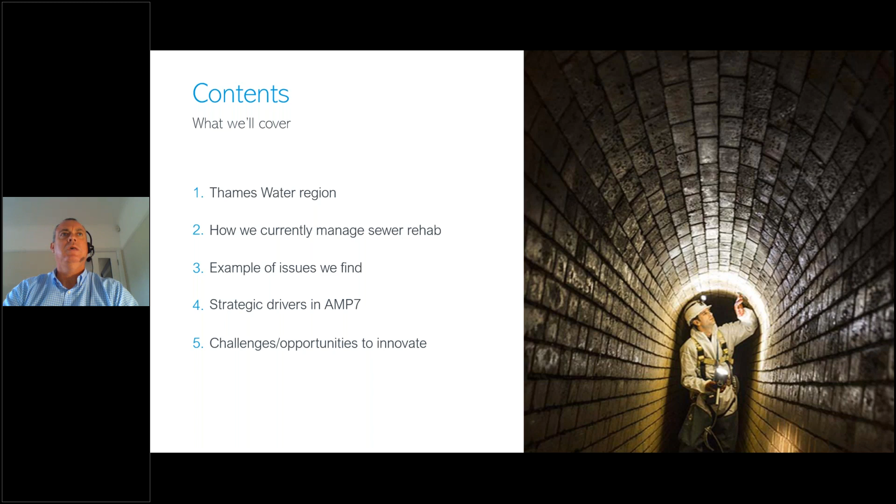Thames Water. Obviously, a very large water company. We have somewhere in the region of 109,000 kilometres of sewers, and a big area covering a lot of London, but also the Thames Valley, all the way down to Cirencester, up to Banbury and places like that. It's interesting, 4.6 billion litres of wastewater per day.

To put that into some sort of perspective, 53 cubic metres per second is the average, or an Olympic swimming pool in 47 seconds. That's the way we tend to look at it. But when it rains, wow, you do realise how much hard surfacing there is in London. So it's a very, very interesting place to work.

With those sewers, the great part of working within Thames is that we have a lot of the original Bazalgette sewers, and the quality of those sewers built is phenomenal. They still look the same as they did the day they were built, and some of the rehab work we have to do on those is sacrilege in my view. When I have to demolish a Bazalgette structure, it's rare that we do it, but we really hate to have to do it.

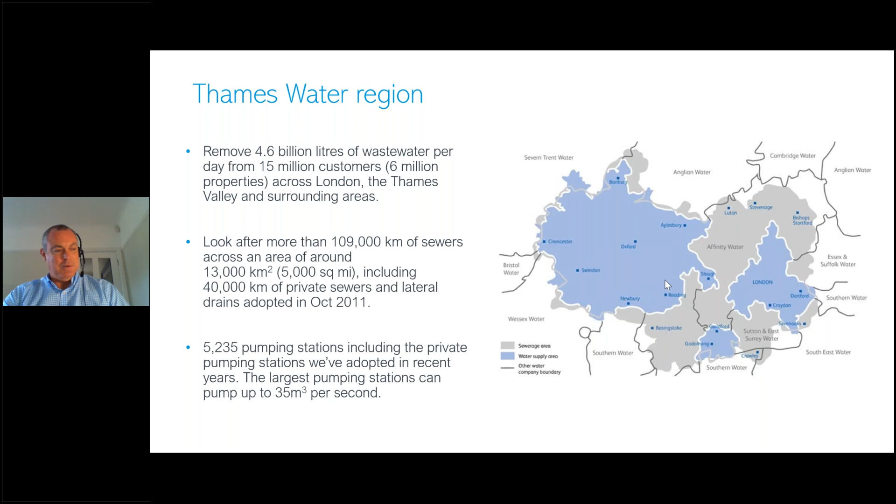A lot of pumping stations, 5,235 pumping stations, and we have some monsters. The biggest one is capable, although we don't use it at that rate, of 35 cubic metres per second if we came down to using that, and that would be absolutely going for it, to be honest. But that's some of the terminal pumping stations that we have.

How do we currently do things? This is where a lot of change is coming into the equation at the moment. Too much reactive work still going on. With this sort of reactive work, there really is a trick about these things these days, which is to actually deal with things earlier. Don't have to react.

If you react at the right time, you're going to actually deal with things a lot cheaper, and I'll talk more about that in a sec. So we're trying to get away from reactive and get more into risk modelling, and actually coming up with proactive solutions to the work.

To do that, though, we need to inspect. I've worked in the industry for nearly 40 years now, with CCTV and that, there isn't enough of it. We need a lot more CCTV surveying. So we do a lot of CCTV now. There's a lot more happening than probably was in AMP6, and certainly more than AMP5 going on.

Really using that information from that data coming back in, we are now certainly doing sensible programming, and dealing with the issues at an early stage as far as possible, using the most appropriate techniques.

Prioritization is a big thing. We don't have never-ending budgets, obviously, and if we can actually get in there at the right time and prioritize, deal with those assets, we're going to find the problem will be dealt with much more efficiently, with less disruption to the public, to customers, and at a far cheaper rate.

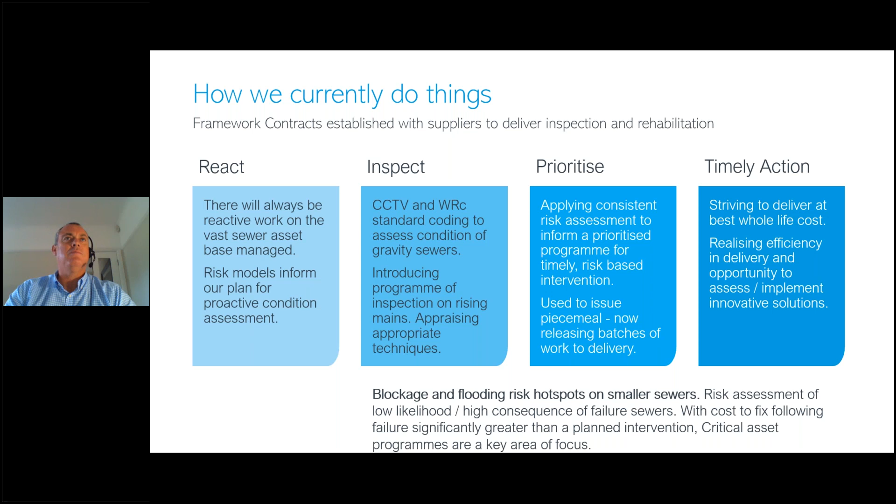Let's go through some of our current interesting projects and some of the problems we are dealing with now. Hydrogen sulfide attack is a major one that we're having a lot of trouble with presently. You can go in there and dose the pumping stations, etc. But what we are finding is that a lot of these places, unfortunately, from previous decisions, it's actually too late.

The sinkhole was around 8.5 meters deep. The top of it was 8 meters in diameter, and it developed within the building. When the actual collapse occurred, we had to find a very quick method of repair, and that repair was to dump hundreds and hundreds of tons of shingle in there. We had to keep the railway stable, so a very, very interesting project to work.

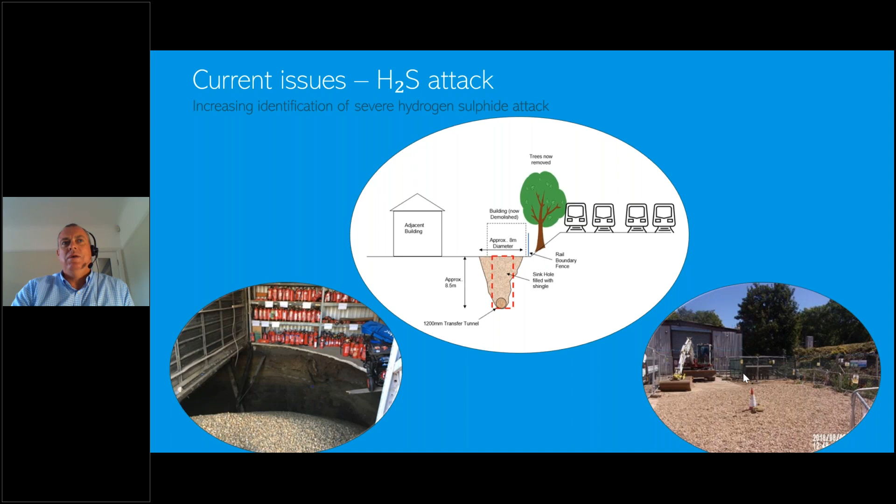What did we find? Big deep excavation next to a railway, not the best of things to do in anybody's book. We had to dig out a very large shaft. We took a decision early on that we didn't know what we were going to find, so we actually structured that shaft big enough to do some serious work from, to allow us to do some pipe jacking if it came down to it.

I talked earlier about interventions. If this had been picked up a lot earlier, this would have been a fairly straightforward lining job. In reality it was difficult - there's 700 litres a second of flow coming into this system from 2 pump stations, but it's one of those jobs where it would have been far, far easier to deal with if we'd intervened at the right time.

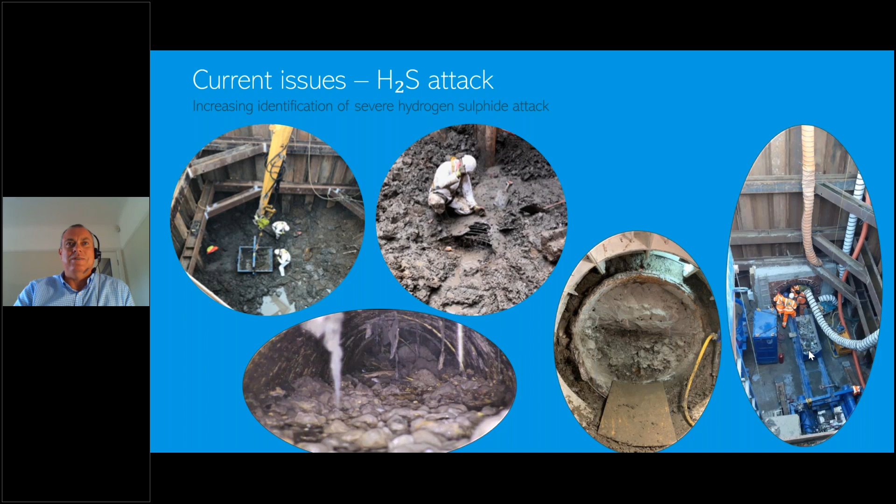A lot of you know me from the railway work, so a lot of my career has been 20 years in the railways. Now this is another interesting one - an asset we considered was owned by Network Rail. Told them about this many years ago, and when it came down to it, they decided actually it's yours, and managed to eventually produce the documentation that proved it was owned by us. They did that 4 weeks before they were due to relay the railway tracks above it, mysteriously.

We had to react to that incredibly quickly, and when I say incredibly quickly, that was literally 4 weeks. We had that stabilized and in a situation where Network Rail could come in and undertake their heavy works to get the railway track up to a decent standard again.

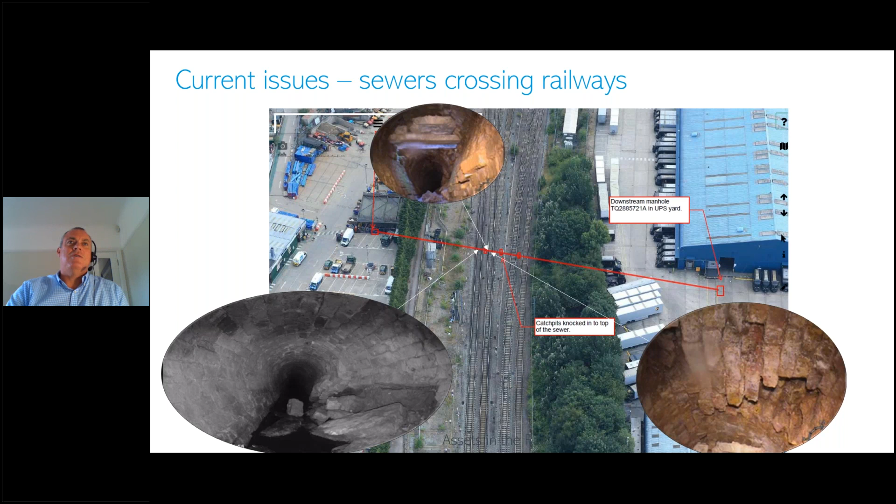One of the other things we get is a lot of third-party issues. Very, very dense urban areas, obviously, we've got, and there is a lot of very expensive construction works going on. When I say interesting, there's a very common theme to this, and it's certainly piling - piling near some of the larger sewers, but also some of the more minor ones.

We're forever spending time cutting concrete out. We're using a lot of robotic techniques now, high pressure water and ultra high pressure water cutters and all those sort of bits and pieces to get this out. But it is a massive problem, and solutions to that are going to be something that we really, really are keen on.

The one on the left there is interesting - this was an exceptional one to see. Dead center hit with a 600 diameter pile on a 1.8 diameter sewer. If I was to tell you that's actually 8 meters deep and within about 2 meters of a railway track, it's pretty frightening that they're there. Luckily, it was a dead center hit, and the thing was judged to be fairly stable.

We're trying to find a way of repairing this at the moment. That pile is actually taking load, so we're having to find a method of getting that pile out with the structure that's above it. Luckily it's not a building, it's actually a structure that's above it, to sort that one out. Concrete's great.

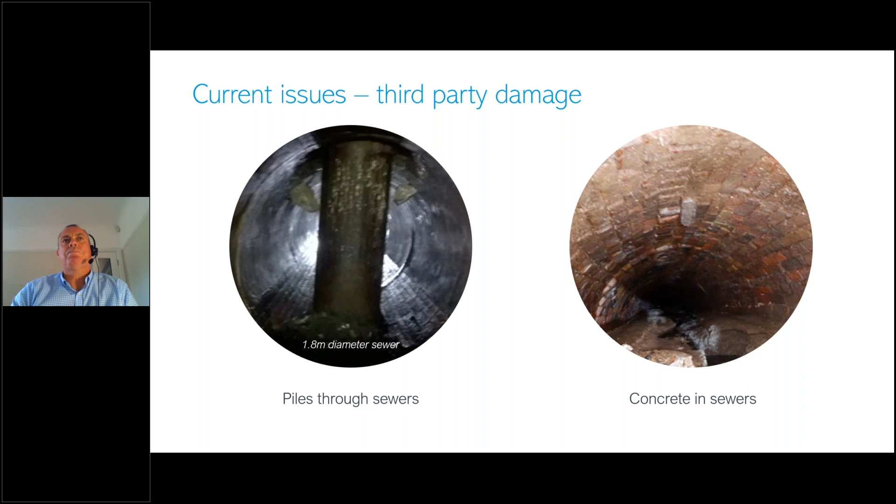A biggie, this is interesting. This is one of the latest things we're suffering more and more from, as I imagine a load of the other water authorities are too. Ductile invert, so invert corrosion in ductile iron pipes. Typically these are pipes from around the 90s, somewhere around that period, and they had a bitumen lining on the inside of the ductile iron. Great product, love ductile iron.

Wrong lining, unfortunately. What's happening is we're getting this invert corrosion occurring on these pipes, where the ductile iron actually wears out slightly in the invert. You're getting some sort of electrochemical corrosion occurring, and we tend to get this lovely little strip developing along the bottom of the sewers, maybe 50 mil, 75 mil wide, pitting at 75 mil intervals. One of the few times we like wet wipes in this industry.

You can see that pipe there, the section of pipe that's been taken out - it's held together with wet wipes. What's happened is they've basically been forced out where the water's actually going through, forced into the gaps, and they actually seal the pipes up very generously for us until you take the pressure off that rising main and let the groundwater pressure in. It's in an area typically with high groundwater levels. The groundwater comes out and pushes the wet wipes back in, and next time you switch that main on, you've got a problem somewhere else. It's an ongoing problem.

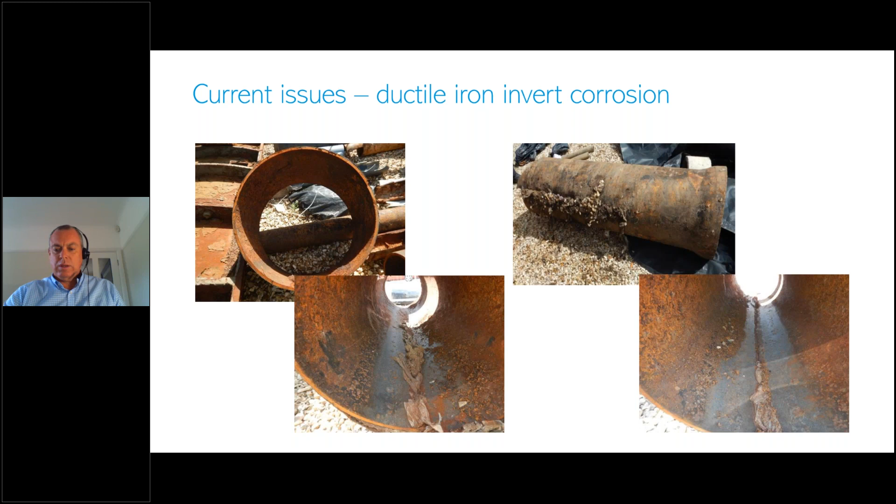Okay, what are we up to? So what are our drivers for AMP7 basically? Certainly the big thing is dealing with critical assets. I come from a world of doing railway sewers, sewers under railways and stuff, but it's much wider than that - we've got numerous critical assets. It could be a pipe just because of where it is, or a pipe that has such a strategic importance you can't divert it or whatever else. There's a lot of work going on around these critical assets at the moment, actually understanding them and producing data, schedules and mapping, so that we understand these assets in a lot more detail.

Ultimately, we've got a lot of work going on with the reduction in uncontrolled escape. A lot of the smaller sewers, we've got numerous sites going on. It's not my side of the business, I must admit, but there is a lot of work to try and stop this going on. We have a lot of problems in central London, obviously, as well, with flooding from sewers. We've got some pretty spectacular stuff.

And we have this lovely luxury before long of the super sewer, the Tideway sewer, coming online, which is going to change things a little bit. It's going to be very interesting, certainly for us, with a lot of the Bazalgette sewers - they're incredibly effective things, and when the flows start getting diverted into the Tideway sewer, it's going to be a big change for Thames. Very, very interesting to see some of that going on at the moment.

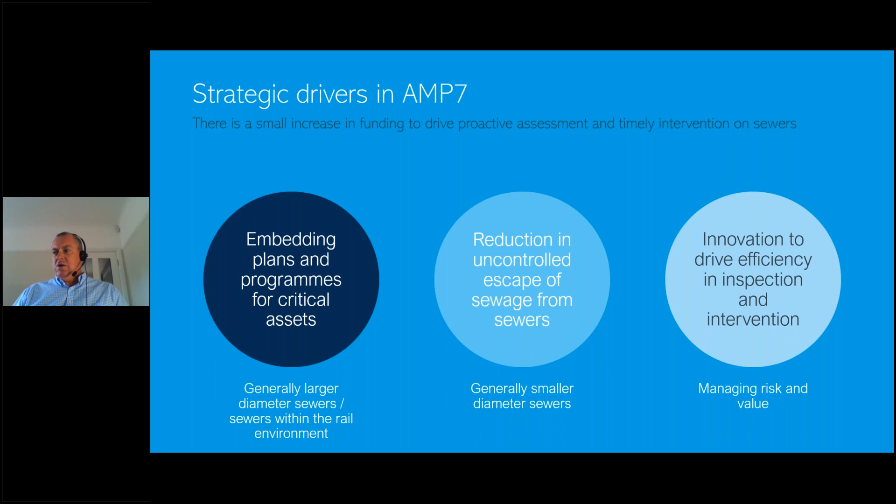That kind of brings me on to the opportunities, and those opportunities are quite key. I've touched on some of the issues that we are planning and struggling with. Well, not struggling so much, we know what we need to do, and we've just got to get those plans into place to deal with them.

And the key opportunities that we're putting out at the moment are associated with rising main inspections. So a lot of work to be done to actually determine the condition of rising mains. It's not easy. We have to generally dig down, do some sort of testing or whatever else, or in the worst cases, actually taking samples out, taking sections out of these rising mains. That has an associated cost with it.

We've got to find better ways of doing this. It's not easy to do, and particularly in some of the assets that we've got, in my world, with the ones that run under railways, actually to get to the rising mains and actually even to take a look at them can be incredibly difficult.

Rising main remediation, the ductile iron, I've talked around that already. A lot of work to be done around that, and new techniques being brought on board. Not afraid to look at anything. It's got to be right though, and if we do find ways and means of doing to that, then that can be a game changer, to be honest.

And one of the particular issues is dealing with bends that we are struggling with at the moment. A lot of rising mains with a lot of 90-degree bends on them for some reason, which are very, very difficult to deal with, and actually do make it difficult with the lining type of stuff.

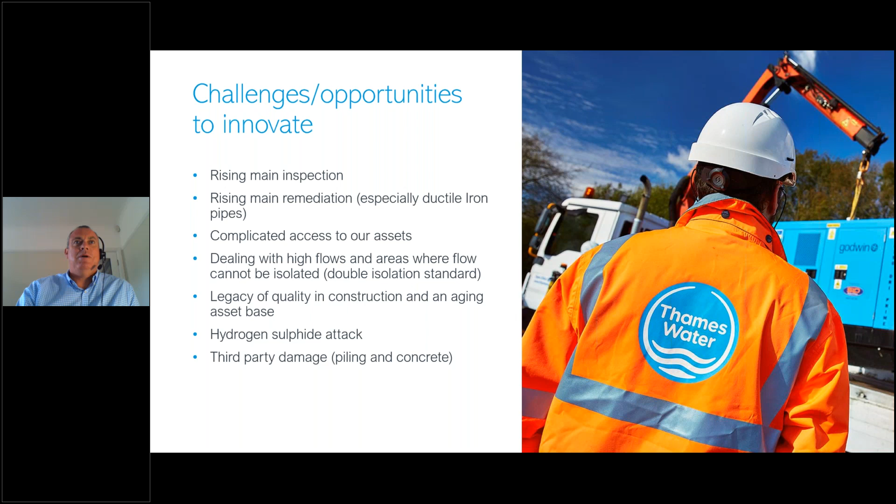So that's pretty much me for the moment. Hand back to you for a second, Ian, if there's any questions.

Hello there, Mark, that was very interesting. The first question I've got here is from Mike Barber, and you've partly answered it, which is because during the past two days we've heard about the effect of H2S attack on concrete pipes downstream of rising mains. It's a bit of a recurring theme, so any thoughts, is this becoming an increasing problem at the moment? I don't know if it's becoming an increasing problem. I think it's the timescale it's been going on for now, and certainly with certain types of pipe, we're noticing it more and more, and it's certainly becoming more of a focus for us as we go through.

It's going to be about intervention. If we can actually get in there earlier and deal with these things, it's not all about dosing pumping stations. By the time you need to dose the pumping station, invariably the damage has been done further down the line. But inspect, maintain, and go in with some fairly low levels of remediation - that's going to be the key to it, I think.

So really, you're suggesting that it's the age of the assets now - this is an effect which we're starting to see. I think from a degree, yeah. I mean, we're certainly seeing there's a common age, shall we say, on a lot of the assets that are showing the signs of degradation that we're getting from there.

Okay, and unless we do something, it's going to get worse, isn't it? That leads on to a second question here from David Pitt, which is about sewer flushing as an alternative to dosing, to change flows and velocities and remove sedimentation and alleviate H2S. Is this something that could be utilized in more situations?

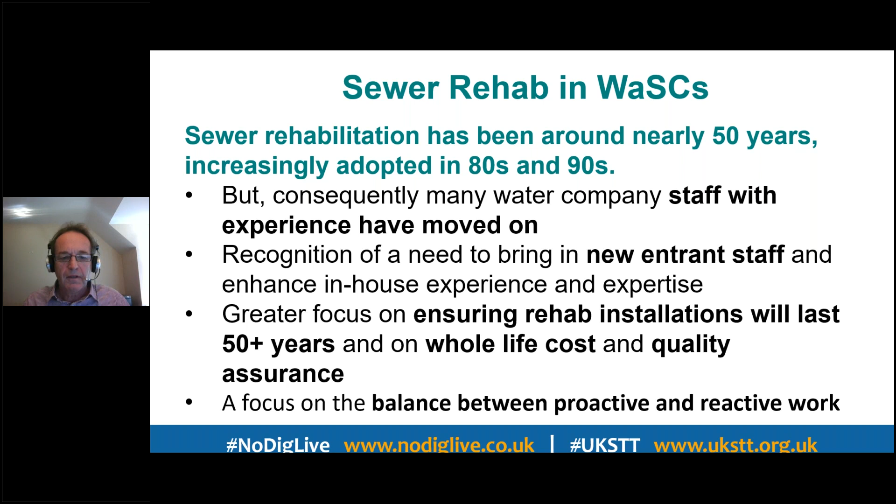One of the things coming out of that, we're sensing at the moment, is a renaissance in interest in developing guidance to ensure this stuff will last for 50 years plus. We're starting to see an updating of key documents. Water UK itself publishes water industry specifications and information and guidance notes, and they are looking at those at the moment.

Most of us will have received last week a copy of the new Manual of Drain and Sewer Cleaning, produced by WRC, which replaces the Sewer Jetting Code of Practice, published about 17 years ago now. SRM,

Sewer Rehabilitation Manual, or Sewer Risk Manual, or Sewer Risk Management as it's now called, is an online platform. A lot of people have a large red volume on their shelf called the SRM and use it for design guidance, but there's a realization the design guidance was getting out of date. So at the moment, there's a process going on to create a new SRM, which will also be a physical manual that can be used.

I want to finally mention British standards, European standards, and ISO standards on this page. We've got Brexit coming along. This may mean a bit more focus on British standards, but the UK is still part of CEN, which writes European standards. The other thing to remember is that increasingly, the standards used for sewer rehab, particularly for CIPP, are now ISOs, international standards, which sit above Europe. So the expectation is that we will be continuing with those as the standards for the UK.

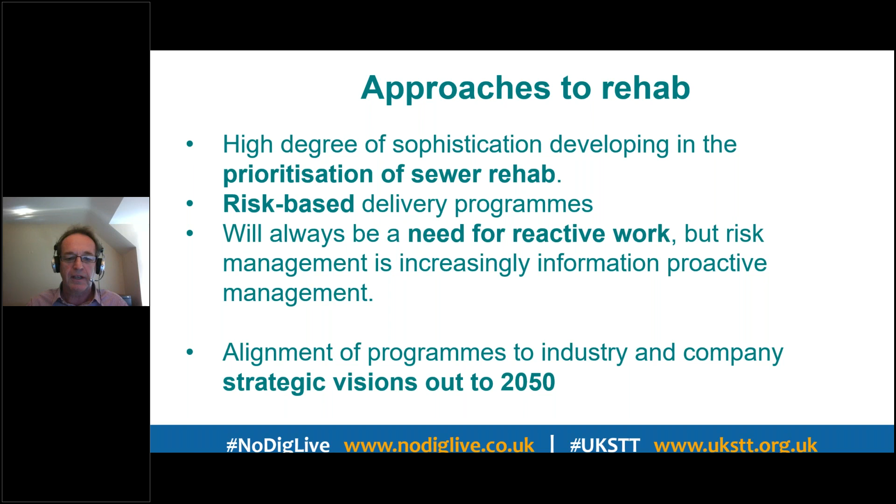Part of this is efficient delivery - tackling known problem areas, and looking at repeat incidents is one element. Yesterday from Severn Trent, we were hearing about root cause analysis in order to really understand the problems and more efficiently deal with them, including rising main bursts.

Rising mains have been, if you like, the poor relation of gravity sewers in terms of rehab. Gravity sewers have been much easier to rehab, so solutions for rising mains have tended to be more dig-down. But increasingly it's realized you can be more efficient if you rehab before the bursts appear.

We're hearing about dealing with the worst hit customers. Sewer flooding incidents within buildings are a complete no-no as far as both CC Water and Ofwat are concerned.

Yesterday as well, we were hearing that there's a focus on efficiency through doing a number of small value schemes which have high value output, as part of the selection. There's also a move from piecemeal to more batch delivery of work. The mantra - risk assessment, prioritization, intervention - underlines what we're hearing about. And let's not forget the innovations which we come on to.

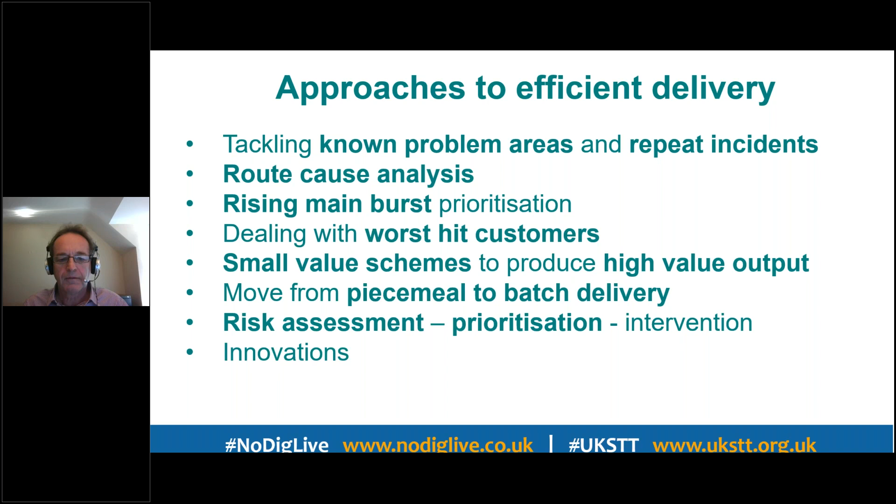Now, I've picked out a couple of other areas of particular interest: artificial intelligence for coding of CCTV.

It's been touched upon - there's general frustration that with sewer rehab, an awful lot of time has to be spent in manual coding, and there could be a better approach if it was possible to use artificial intelligence, so crews can spend their time cameraing and not coding. In theory, this would help achieve the goal of surveying more sewers and getting a much better handle on current condition and changes in condition over time, which CCTV can help with.

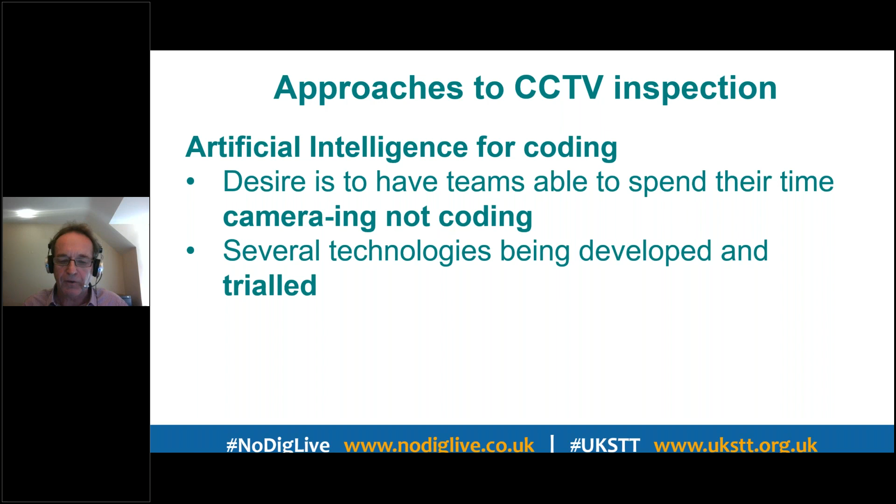So there are a number of technologies being developed - a huge range of companies getting involved in this area, and a number of the water and sewage companies are conducting trials or evaluations at the moment. I think this is something to look at. I would be surprised if in 2 or 3 years' time, or by the next AMP period, use of AI was not standard in the survey side of sewer rehab.

Proactive rehabilitation is a bit tricky to get absolutely right, but what we've heard about over the last couple of days are some of the areas for proactive rehab. Obviously the supercritical assets - we've had several presentations with very good examples of the consequence of failure. I knew Mark with Thames Water would have a couple of extremely good examples, and certainly in the sewer rehab contact group, it's always remarkable to hear what Thames Water has to deal with - the sheer number of railways and the intense urban development over the top of them.

Pipe bridges are coming up now, and there's new rehab available for those, because they are effectively underground infrastructure which is overground, so there are different ways you can deal with them.

Infiltration - increased interest in infiltration and proactively trying to prevent it, because if you do that, you reduce surcharging of sewage treatment works and the consequences for risks of fines from the Environment Agency for spills to the environment. Trying to prevent events happening.

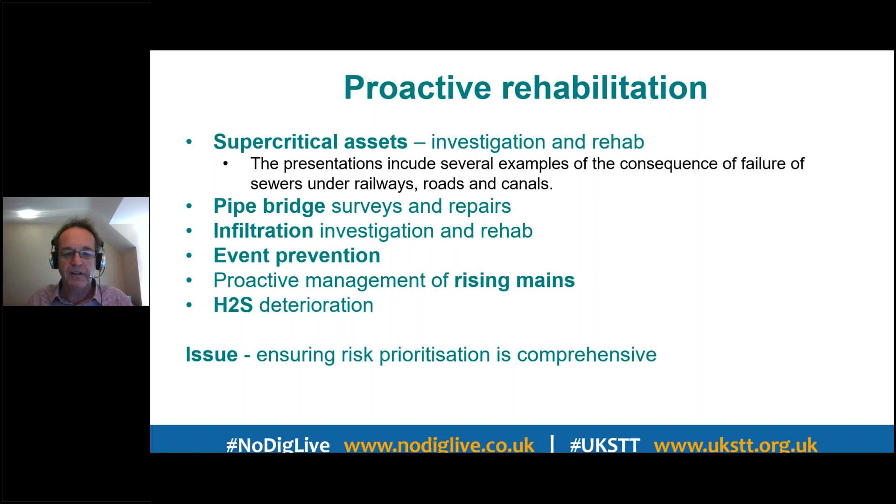The management of rising mains we've mentioned, and H2S deterioration keeps cropping up in the questions and in several of the presentations. An underlying element of all of this is the need to ensure that risk prioritization is comprehensive, so getting the best possible information and data - that's been touched upon again in the last presentation.

So let's have a quick look at rising main rehab as well. The focus, as I mentioned, was on gravity sewers, not on rising mains. The technology is developing - there's a lot more interest now by manufacturers of CIPP and other lining and replacement technologies in making their products available for the rehab of rising mains. But this has meant the standards are lagging behind.

There are tests for static pressure, but standards still haven't come up with a final definitive approach to dynamic testing, because you've got to deal with negative and positive pressure fluctuations. There have been a dozen or so trials already in the UK, and there are more to come.

But to date, it's been more open cut, except where you're going under a road, a rail, or underwater, where it becomes more appropriate to go for a rehab option. And as Mark mentioned, and everybody's finding, it's very difficult to inspect them and to do condition assessment, particularly because you've got to halt or divert flows.

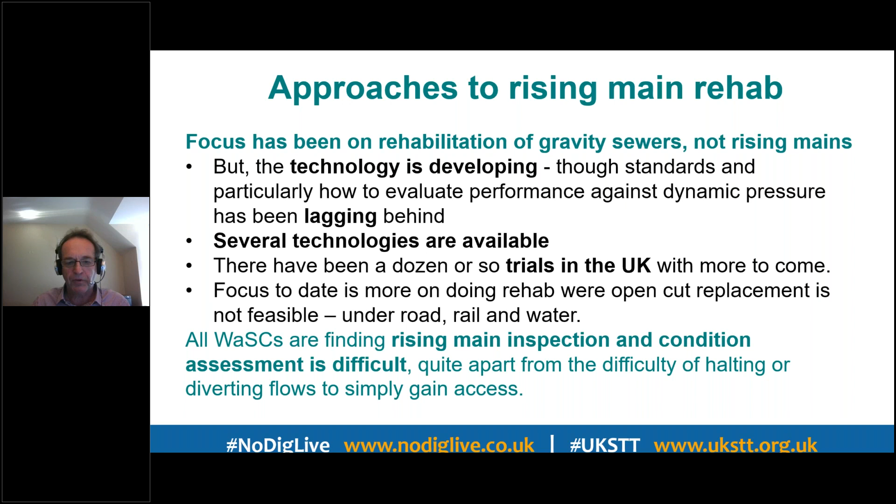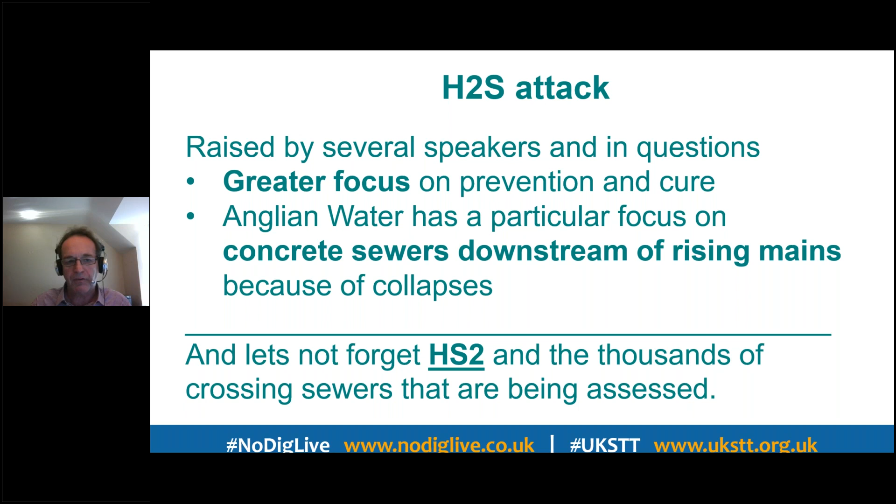H2S attack has been picked up, greater focus. Yesterday, Anglian said they were particularly looking at concrete sewers downstream of rising mains, and we've heard a reminder about that just now from Mark. We've got H2S, but let's not forget HS2. There are thousands of sewers crossing under railways, or under the route of it, which are being assessed, and there's going to be quite a large program by the water and sewage companies across which these new tracks cross, where there are opportunities for the no-dig industry.

Now let's move on to the consequences of the pandemic. There are essentially three stages for water and sewage companies and everybody else in the supply chain: first, preparing for the pandemic, and that's still ongoing because we still don't know exactly how this is going to pan out. We're waiting to see how this virus develops. It could be that we've only seen phase one and there are further phases to come, with a need for further change. The second stage is responding, which everybody has been doing.

Finally will be the recovery. Now, we're not recovering from the pandemic at the moment. What we are doing is still responding. There's a bit of recovery as things change, but we're not into the real recovery phase. The pandemic is not over.

So a whole range of consequences for everybody: work program delivery delays, we've heard a little bit about that. Perhaps changes in material lead time. I know around the world that water and sewage companies have experienced issues with the supply chain and having to create a much more robust supply chain. Perhaps an increase in customer complaints and incidents, and a reduction in the ability to attend on site. So when there is a problem, it hasn't been possible for everybody who needs to go and stand around on site and look at it. So new methods have had to be found to deal with that.

But what we're seeing during the pandemic was continuation of essential works. What's been important to everybody has been essential worker classification for water and sewage company staff, but also for contractors, to ensure the authorities and the public accept them being on site. Reprioritization of work with no customer interaction, changes to health and safety, and obviously a big one has been the introduction of working from home, which is, of course, where probably most of you today in the audience are working from.

What we are seeing is more of the proactive work being able to restart as people have become a bit more comfortable and the national restrictions have been relaxed.

We've heard a bit about innovation over the last 2 days, quite a lot in fact. I've highlighted a few of them here, and we've just heard more from Mark. I know that when Tom Ogden from Yorkshire Water does the last presentation, he's got a list of the innovations they're interested in, but I've put them on here.

So survey techniques, the AI for CCTV coding, no-dig methods - yesterday Severn Trent was mentioning they're looking at methods for removing siphons and lining without having to dig down on them. The rising main lining, pitch fiber management, hydrogen sulfide attack, and this real-time analysis of telemetry predicting flooding and pollution.

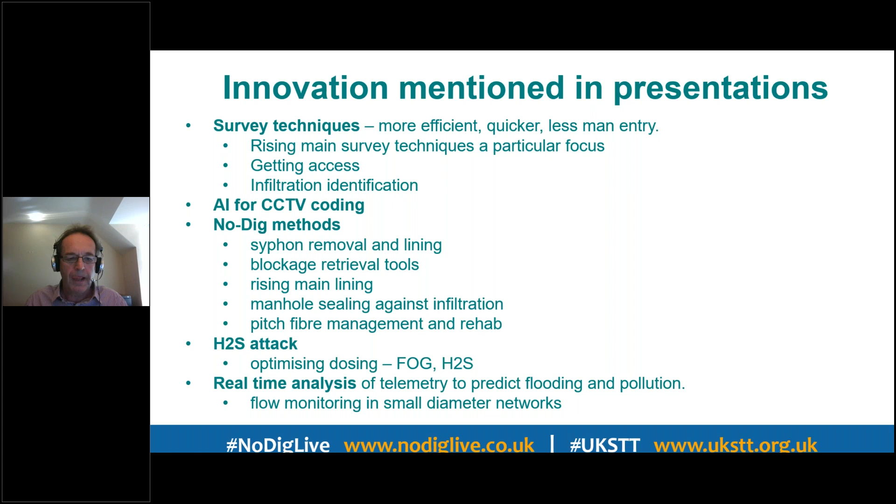So a lot, if you like, for the no-dig industry and UKSTT to get their teeth into. And my final slide: innovation is not just about pieces of kit and techniques. The joint innovation strategy, put together by the water companies, also highlights the organizational and procedural innovations needed alongside technologies. Yesterday, Northern Ireland Water's presentation highlighted a number of organizational changes they are making, including in-house modeling, changing their capital works procedures, program management, introducing KPIs, cost management, programming, and reporting. Underpinning the joint innovation strategy is a realization that there's a lot of innovation out there which doesn't necessarily see its way through to implementation, so there's going to be a big focus on implementation.

That brings us through to the break. I had one more slide: expect to prepare for the new normal. We're not going to go back to the way the world was. We will be seeing a new normal, and we hope that these two days of presentations will help the attendees understand that.

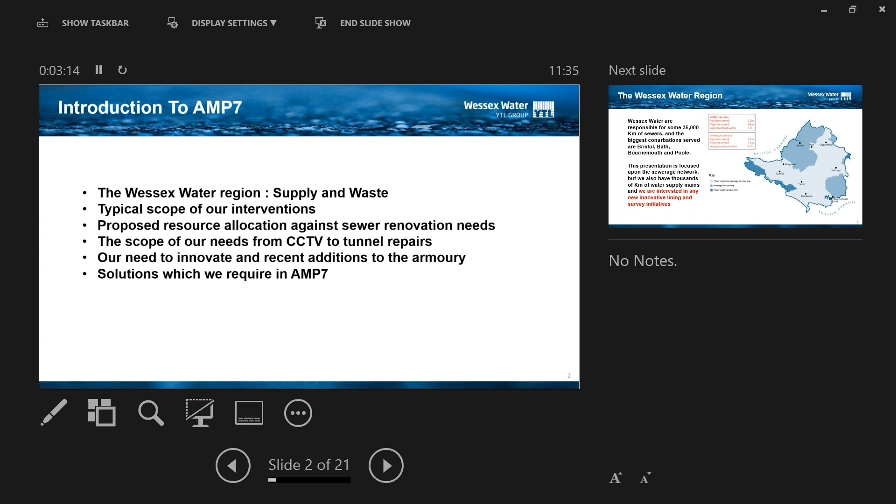Julian, currently your slides are not visible, so I think Alice was going to take over your slides. Would you like to put those up, as we seem to be having an issue there? Right, so we are just waiting to see Alice's screen. Julian, can you see that okay? Yes. If you'd just like to ask her to move slides forward, I think that's the efficient way of doing this. Okay, you're on the right slide.

Back to O'Sullivan's carbon calculator 10 years ago, we calculated that CIPP generated 95% less CO2 than open cut, and pipe bursting was 86% less than open cut. We also calculate and report to the Wessex Water Board the excavation avoidance volumes, the amount of excavation and muck away we avoid by using no-dig techniques, which equates every year for us to around 125,000 tonnes. That also means we do not import another 125,000 tonnes of graded backfill from the quarries, equating to around 30,000 lorry movements which don't occur on our roads each year, with all the benefits deriving from that.

Our involvement with UK STT and ISTT started the month the team was established in September 2004, and grew with Russell Fairhurst's instigation of the patrons concept about 8 years ago. We are grateful to Don Grigg and the current chair of UK STT and Westrade for this opportunity to talk directly to members and share visions. We would not want to miss the opportunity of thanking all past chairmen as well.

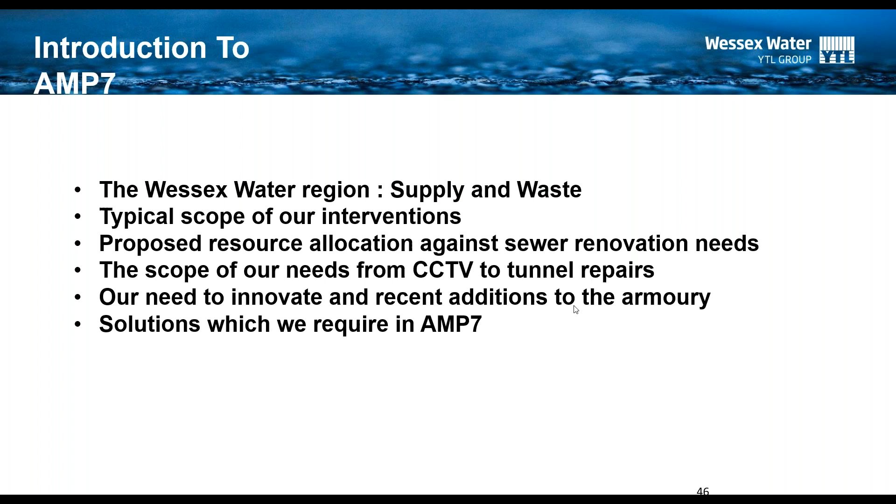We're one of the smaller water companies with sewerage services out of the 10, serving a population of about 2.5 million people with sewerage services and 1.2 million with water services. I won't be referring to potable water mains much in this presentation, but I'd reiterate that we are interested in any new innovative solutions for renovating water mains, as long as those solutions have or are pending DWI Regulation 31 drinking water approval. Focusing on the 35,000 kilometres, I would carry on with the next slide, Alice.

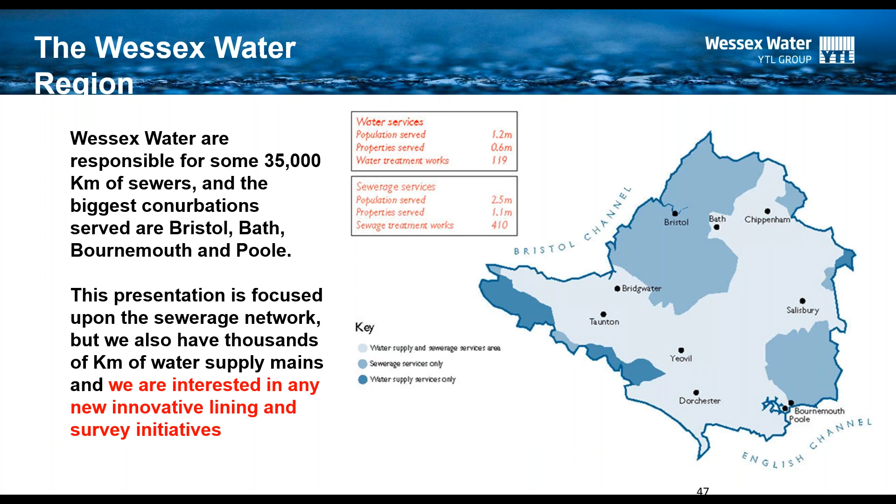Julian, I might have to stop again because it appears people are still not able to see the slides. Would it be useful if we skip my presentation today and I record it for you instead? No, I think we're going to carry on with your presentation. Wait a second, somebody, right, okay. It appears now that the audience can see your slides, so I'm hoping we can continue on that basis. Right, okay, carry on, Julian.

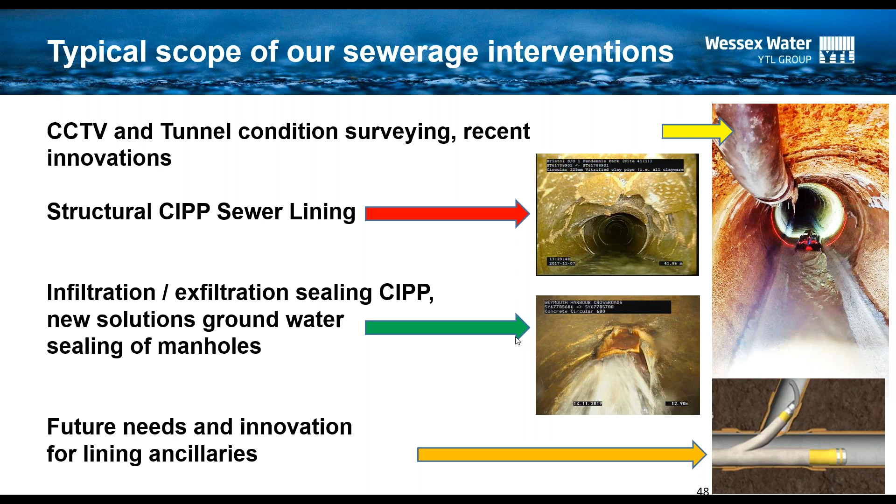Our workload in AMP7 shows an increasing investment, and we need to address serious sewer defects presented by our planned and reactive needs. We have a framework partnership for our CIPP linings and complete around 30 kilometres per year covering structural, infiltration and pollution interventions. Beyond that, we are searching for solutions to a number of problems highlighted here in the presentation. Next slide, Alice.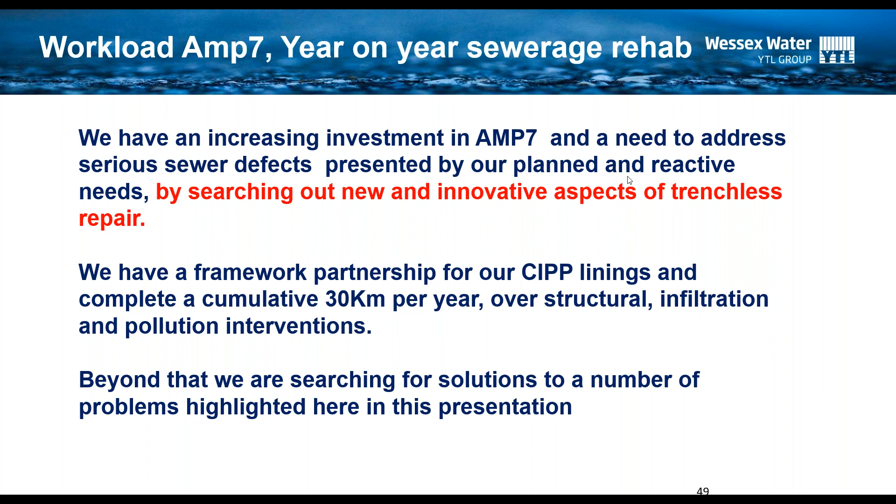CCTV is common to all of us. With our 30 to 35,000 kilometers of sewers, we have around 10 vans on the road every day. This poor operator has to log every defect, which means we usually only achieve around 500 meters a day. So what if we could triple that meterage or more and reduce the occupancy on the highways?

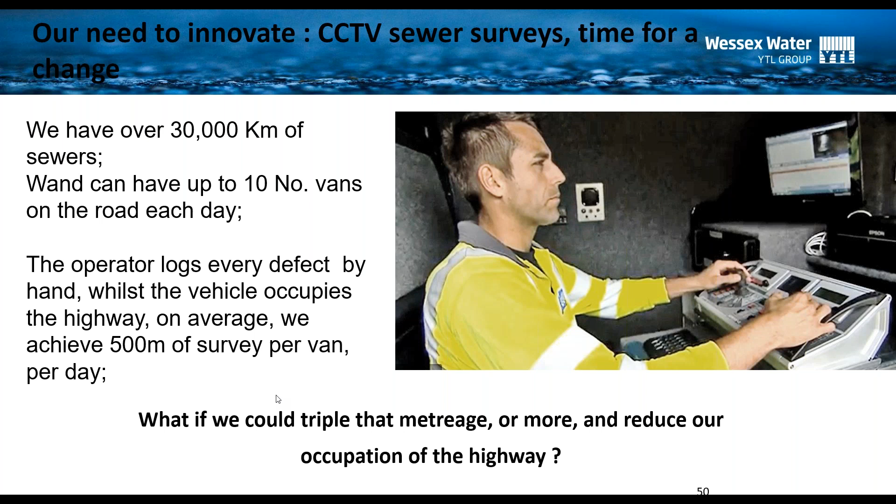Around 2015, we worked in support of Exeter University's development of their sewer classification factor analysis algorithm. This is big data and artificial intelligence, and they were very successful, achieving around 80% on their first run using some very complicated applied filters and classifiers. Exeter University attracted another partner at that time, so Wessex decided we would explore alternatives worldwide, some of which we saw from the ISTT shows, and we put them onto our marketplace.

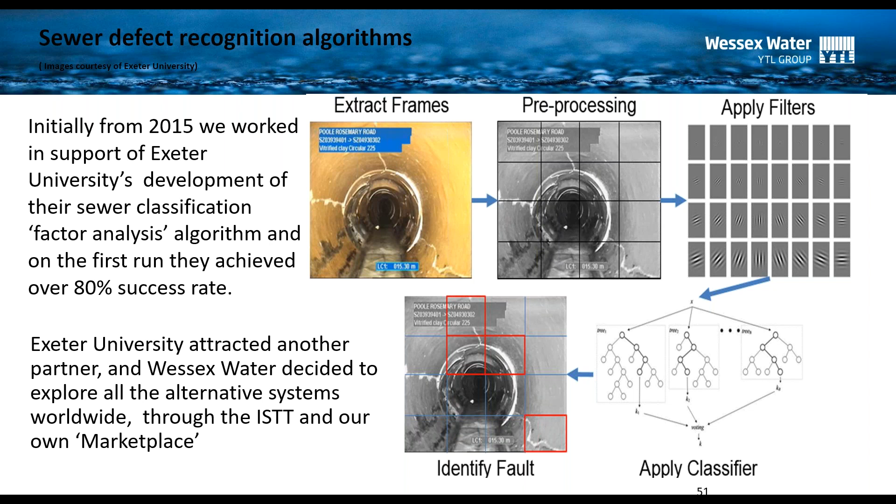Our marketplace is on the Wessex Water website, and I'd encourage you to check it out, because it's in this location that we put our aspirations we can't find answers to. This was the place with the defect recognition algorithms. We attracted 31 companies, of which 4 are outstanding, and we've taken those on to the next stage of evaluation. We'll be able to report back on that in 2021, and we look to share that information with all the other water companies as well.

The next slide is all about filters. Once we have the algorithm in place, we only have a certain amount of TOTEX, as you've heard from the other water companies, and we want to spend it on our most deserving assets. So if we came up with, say, 2,000 lengths of sewer which were all SRM grade 5 in a particular year, we would then subject that to these filters, such as highway loadings.

Some of the roads in Bristol have recently changed, more traffic on them, more axle loadings, etc. The water table can go up and down. The host geology is very important - are we in a running sand, etc.? From that, we could refine those 2,000 down to maybe 500, the ones which would be most critical to us.

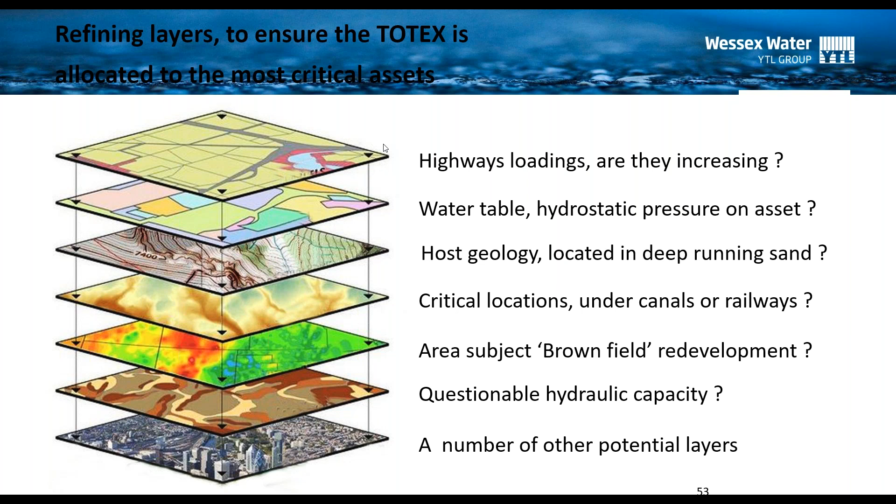I'd just touch on the problem of permitting. It's new to us, I know a lot of water companies out there are already involved with it. This has led us to consider autonomous CCTV in AMP7, and we'll be exploring these to align with our imminent adoption of the CCTV algorithm to further reduce our highway occupancy.

In 2015, a number of water companies came together at Water UK to collaborate in compiling a directory of techniques for the survey of large diameter conduits or tunnels. This comprehensive document took a year to compile, and it concluded that a few survey platforms are available in Europe.

But also at that time, we were looking at LiDAR surveys, which were being undertaken by the Environment Agency within our region.

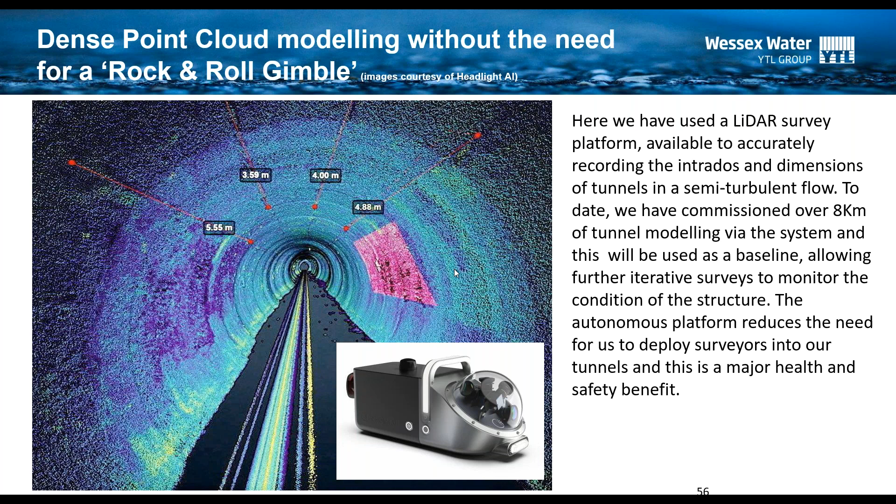This next slide is close to Ian's heart, because we've had a long-established relationship over the last 15 years with IKT of Gelsenkirchen.

When we've identified structural and other concerns in relation to the tunnels we've been surveying with the boats, we can often go in and undertake this MAC extensometer.

We came together in 2016 with IKT to deploy this extensometer, as you can see in the photograph, invented by Dr. Olivier Thépot of Eau de Paris, who you may know. He's played a great part in the ASTI3R designs for ovoid GRP liners.

If I can just explain the extensometer, there's a central ram, which you can see there, which is forced out under tons of pressure to only bend the lining of the tunnel by parts of a millimeter. You can see there are 3 silver bars, which are the spring-loaded extensometers. The one in the middle above the ram will obviously move the most, which is what you would expect, and the 2 at the back and front there will pick up the residual bend in the liner. So that gives us an understanding of how the lining deviates under load.

Now, we also do geological cores on the outside to find the geology and lithology, and we also take cores of the actual concrete lining itself, which we crush to get the UCS strength. And when we put all of these together, we can work out via finite element analysis the longevity of the tunnel.

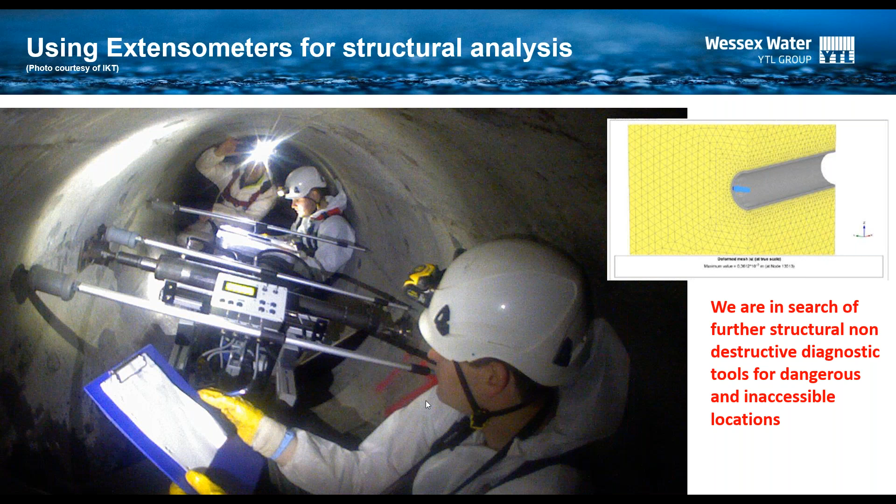We'd be very interested in any innovation which allows us such structural analysis through non-destructive means and in non-man entry diameters, such as maybe down the pipe radar, mapping external geology outside the confines of the tunnel construction, things along those lines. Next slide, please, Alice.

I caught the end of Ian's discussion about hydrogen sulfide. It's a major problem for all of us water companies, especially companies in the Far East and in the Middle East. You can see a severe hydrogen sulfide attack here.

Now, the interesting thing is that the United States Environmental Protection Agency state quite clearly that if you've got more than 5 parts per million of H2S, as you can see here on the y-axis, then you're going to start to have corrosion. And you can see in this particular sewer that we've got in Wessex, that it's way up above that, averaging probably around 15 to 20 parts per million.

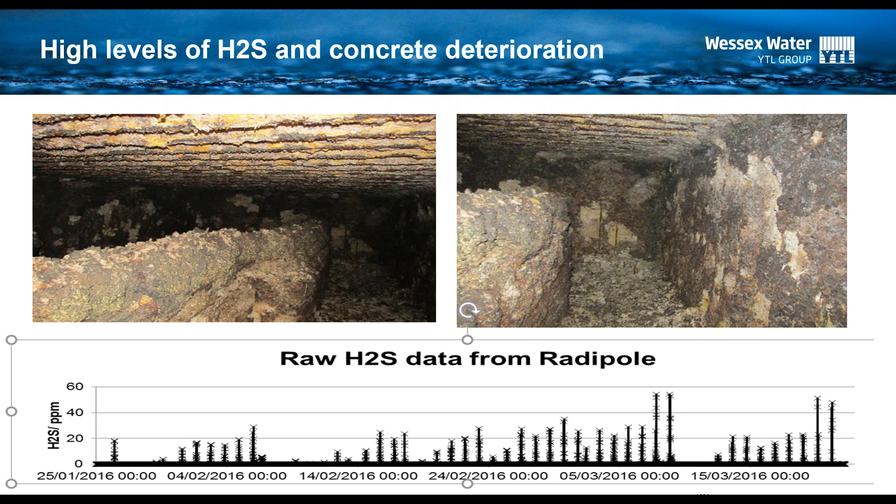Next slide. So to look for new solutions, we have a long relationship with Sydney Water, and they had 20 years of back data on the use of calcium-aluminum cement veneers. And so we've started to use these.

We will take a damaged shaft and scabble back the sulfate-resisting concrete, which is already there, damaged. We'll clean it up, and then we'll coat it with a 40 mil veneer of dry mix shotcrete.

Now, the interesting thing about calcium aluminum cement is that it will resist all attack down to a pH of 3 - that's the equivalent of lemon juice. Beyond that, and up to that point, it sets up a gel layer or an effective protective layer. Beyond that point, it recognizes it's going to be corroded down to a pH of 1, but it still only corrodes at 1/10 that of SRPC. So if your SRPC was going to last 10 years, it would carry on for 100 years.

And we're starting to look at this not only in our tunnels, but on our inlets to our sewage treatment works. This is just another example of how we're adopting all these new solutions.

Next slide, please. So not wanting to stay still, we started to think about what were the next materials. Right, so we wanted to look at the next generation of materials. One of them is geopolymers, which are like volcanic glass materials, and they're used around the world at the moment, and some epoxies, etc.

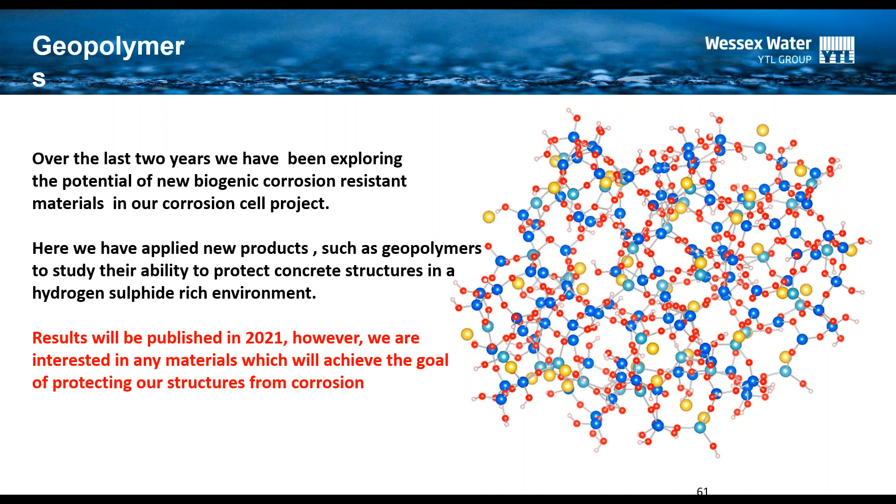In regard to the CIPP, as far as Wessex are concerned, our missing product, our missing link has always been tube-on-tube repairs, junction repairs. So we have liaised with an Australian company, and literally the materials have all arrived today at Heathrow for this new development, which is called the LatSeal.

The whole device actually stretches. One of the things I'd say is a benefit of the UKSTT is the Young Engineers Award, which is given every year. A couple of years ago, one of our young engineers, Helen Isaacs, won it, and we sent her to Australia for a month, where she toured all the water companies, soaking up all the best ideas and bringing them home. Another one of the inventions, which I'm afraid we don't have a photograph for today, but it's in the crate, arrived at Heathrow.

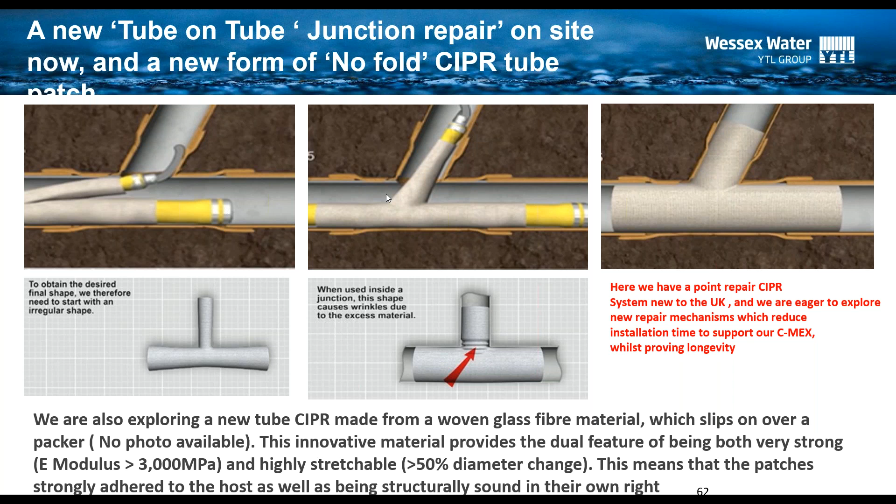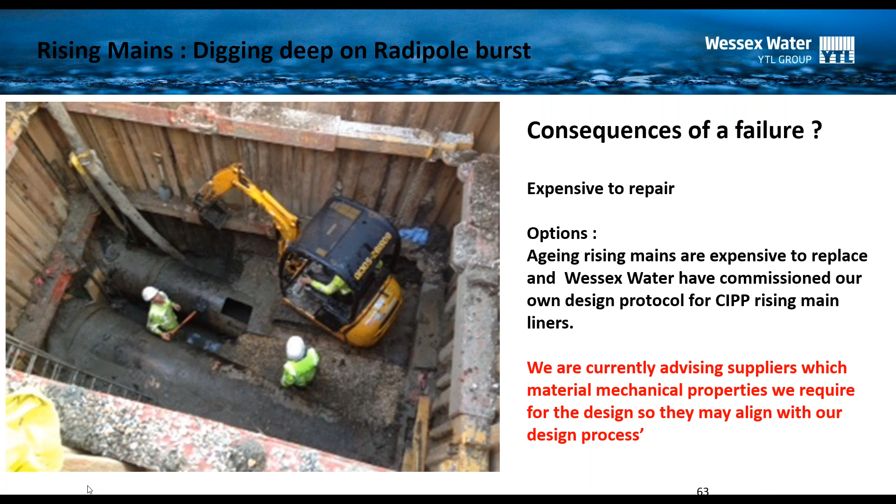So with regard to Gravity CIPP, we now have the manufacturing installation standard ISO 11297 for rising mains, and that is about all we have, because we don't have a recognized design standard in the world for CIPP rising main liners. So at Wessex Water we procured our own, which has a series of 6 concepts. That came about because of the next slide, whereby we were lining the rising main at Christchurch.

When we called for the mechanical properties of the tendering companies' linings, none of them seemed to align - they had different values. So by setting up the 6 equations for our own design of linings, we can help the suppliers understand what properties they must provide us for the equation. So we've turned the whole thing around.

I think this is only going to get better as we work with IKT and the other water companies on the rising main lining project at Gelsenkirchen, which I think we'll be reporting on next year. I think we'll have a much greater holistic understanding.

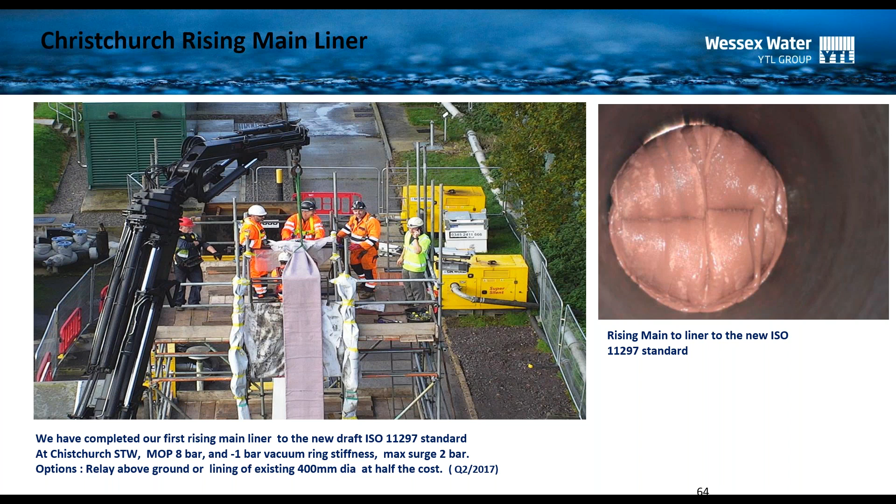Next slide, please. So coming to the end, our aspirations are to look at new materials. Spiral winding is of interest to us. Bill Menzel introduced it at NODIG in 1987 - I know because I'm old enough to remember him speaking. It's been very popular in Australasia and parts of the United States, and certainly is an alternative to GRP lining. We'd like to explore that.

Also, I said I wasn't going to talk about water mains, but they are important to us. We know of a couple that are reaching accreditation with DWI Regulation 31. It's a challenging situation with out-of-service requirements and very tight timescales, but we hope to be looking at all of that as well. So, next slide.

So, in conclusion, looking worldwide as we do, it seems to us that innovation has become exponential in the last 2 years - there's so much of it. We're able to bring about solutions which reduce the socio-economic impact and mitigate the disruptive elements of our activities on our customers, giving them a better experience of our necessary interventions.

So we welcome new initiatives, innovation, and we have a track record of encouraging new concepts. And if you feel you have something new and exciting, then give us a call. Thank you very much.

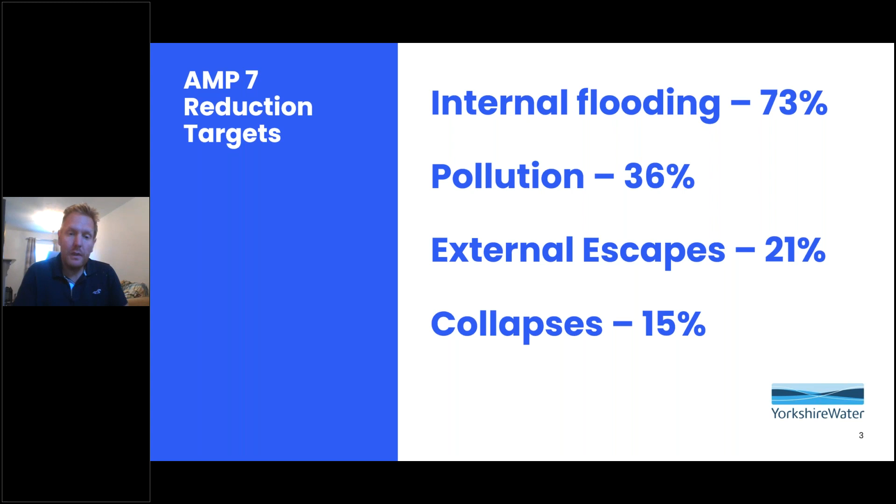As we all know, Yorkshire is God's own county, but we do have a few problems, and we've got some very challenging targets throughout AMP7. Internal flooding is the major one there. We've got a target of a 73% reduction in internal sewer flooding, 36% on pollution, 21% on external escapes, which is a new measure brought in this time, and a 15% reduction in collapses throughout this AMP period. I think if I tell you a little bit about the sewer network and the issues we have, that helps explain why those targets are so challenging.

We've got about 5 million customers in Yorkshire Water, 1,000 kilometres of river, 12 long sea outfalls, 640 treatment sites, 58 sludge treatment sites, and we get through about 1 billion litres of sewage treated per day.

And we've got 58,000 kilometres of sewer. 22,000 of those were transferred in 2011, but we've only got about 33,000 kilometres of our network mapped. So we've got a large chunk of network we don't have visibility of, which causes lots of issues. We've got 2,700 pumping stations, of which 720 were transferred in 2016, approximately 1,300 kilometres of rising main, 1,900 combined sewer overflows, and more than 2 million manholes.

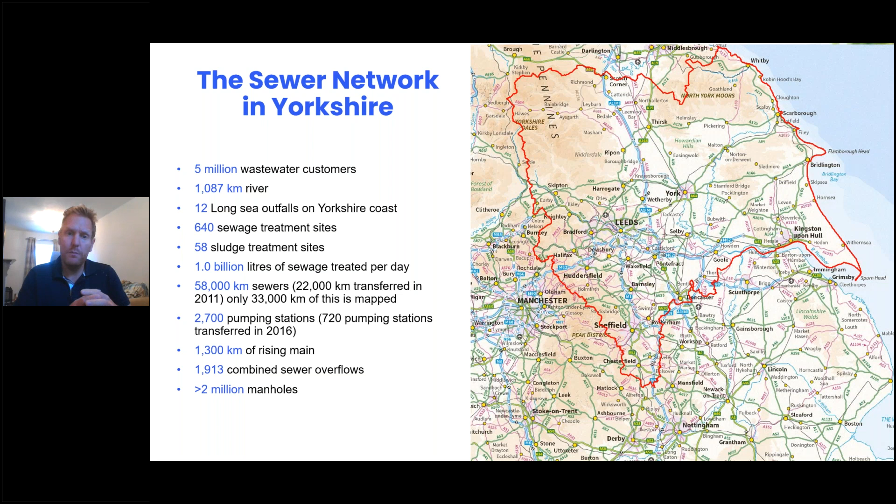And it's a jolly big place with lots of different areas and different problems, from your big cities to your rural catchments.

Just a few of the issues here linked to internal sewer flooding. So yeah, it's not all green pastures in Yorkshire - lots of old housing stock, terrace properties. So approximately 260,000 cellar properties in Yorkshire, which come with some unique problems.

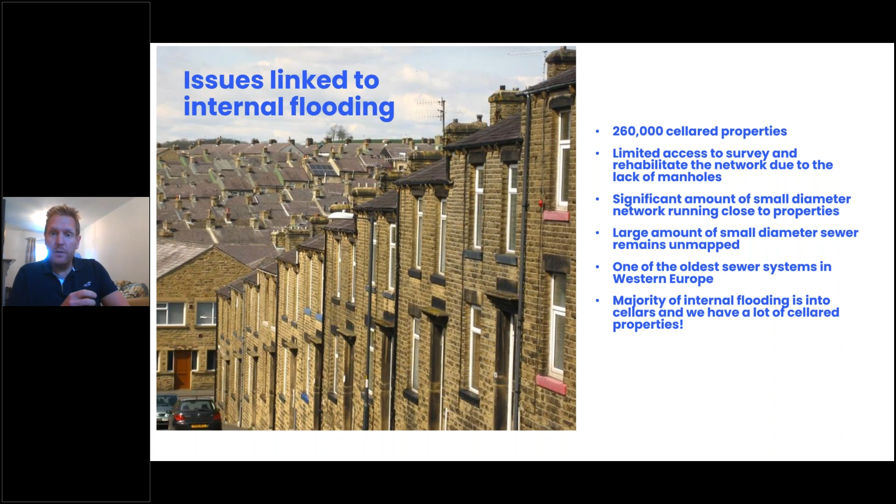Really limited access to survey and rehabilitate the network due to the lack of manholes. Significant amount of small diameter network running close to these properties, and a lot of this remains unmapped. It's one of the oldest sewer systems in Western Europe, and the majority of internal flooding is into cellars, and we have a lot of cellar properties. It's all vitrified clay, 4-6 inch sewers. All it takes is a little blockage and it can cause leaking into the cellar below, which causes lots of issues.

Just a little bit about the pollutions - this is the second most challenging target. Most pollution incidents reported to Yorkshire Water come from the sewer network, often hard to reach places for inspection and maintenance. Manholes within those hard to reach places are often really hard to locate, which makes it even more difficult to do any maintenance or surveying of those assets. Conventional CCTV is challenging to get to some of the places we need it to be, and telemetry is a big issue on the network as a whole, but especially around pollution areas. We've got over 2 million manholes and less than 3,000 level monitoring points on the network. That is improving, but still a long way to go.

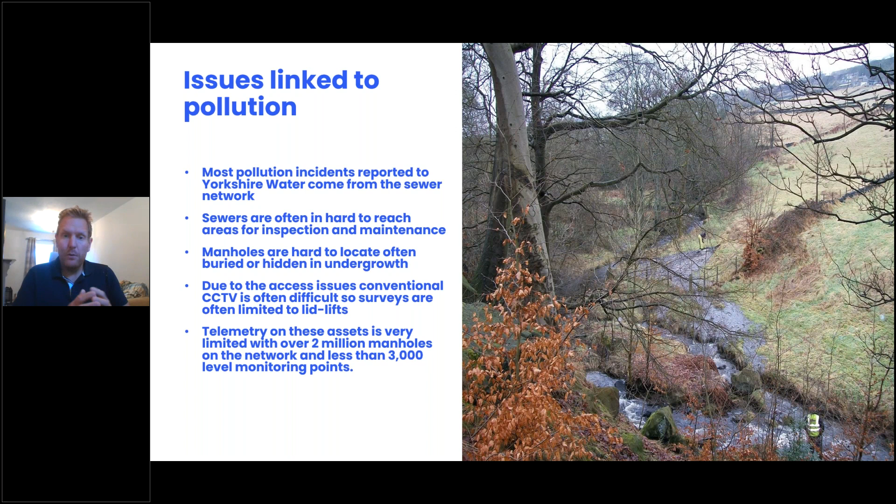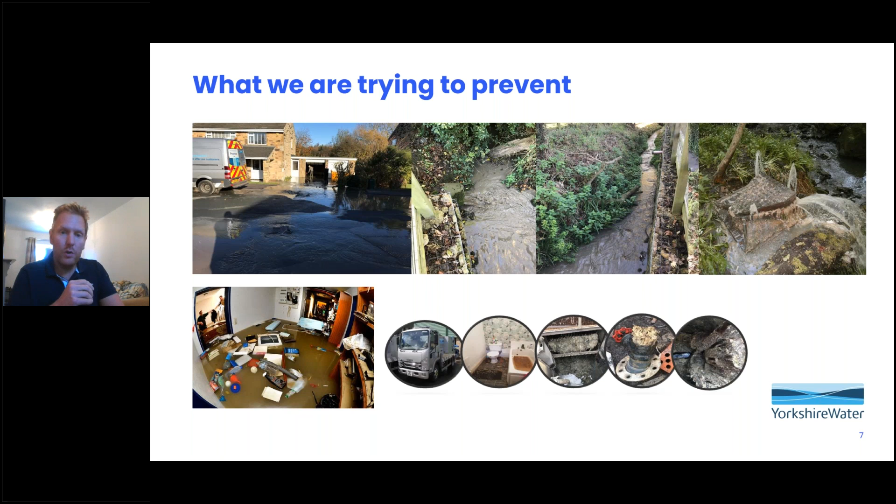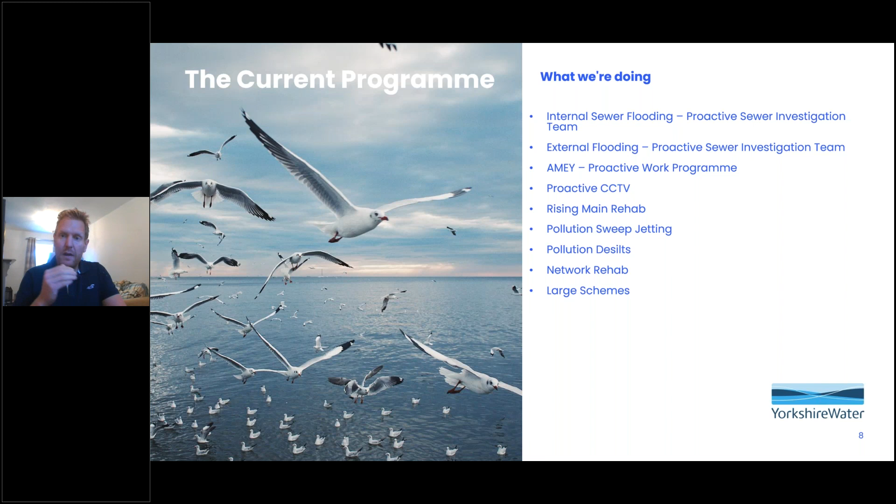So what we're currently doing - this is based around our proactive programme, and doesn't take into account the large amount of surveys carried out every day on a reactive basis and repairs. We've got lots of different schemes ongoing that I'll give you a quick whistle through, to give an understanding of where our focus is for this AMP period. I think that target of 73% reduction in internal sewer flooding is a key thing we're focusing on, as you'll see through the schemes.

So we've got various different find and fix programs going on. The biggest one of those is the proactive sewer investigation team looking at internal sewer flooding.

So we're looking to survey 150,000 properties. That's visual inspections, CCTV, and trying to get access. That poses challenges with trying to get into the properties and trying to get access to our assets. But we've got a target of 1,600 defects to repair on that programme.

37 different teams being utilised, and the properties selected for this are on a geographical risk basis. So whole areas are being selected and surveyed, based mainly on history of flooding and cellar properties. This AMP we've taken the same approach with external sewer flooding.

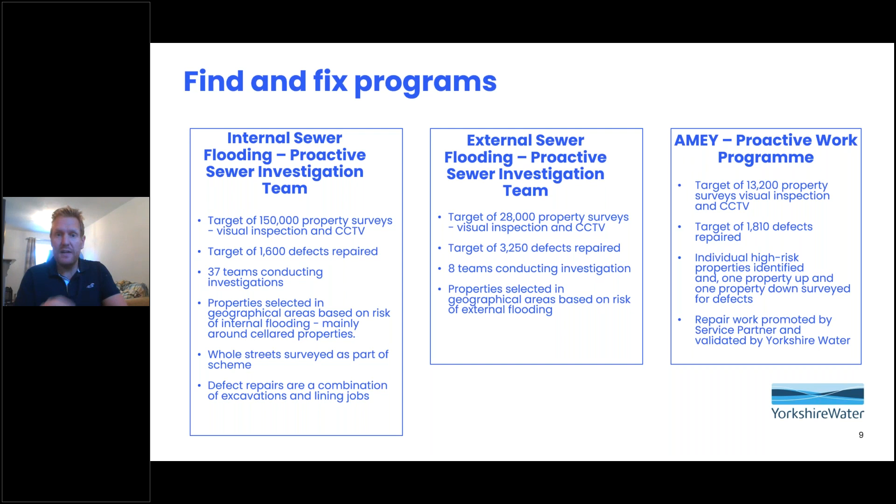Some of the other programmes we've got: our proactive CCTV programme, we've got a target of 355 kilometres of main sewers to camera. All surveys have been coded and integrated into Info Asset Manager, and we are looking to make approximately 800 repairs off the back of that.

Rising main rehab wise, we've got 12 sites currently being investigated for rehab work, 2 sites being promoted for relining work. So we've got a Sanitube liner installation coming up, and we are looking to do a spray in situ liner that is looking to be used as well.

We've got desilting work going on, doing 78,000 metres of desilting linked to pollution risk and 140,000 metres linked to high risk internal flooding areas. We've got a sweep jetting inspection programme, going and visiting the high risk pollution sites. That's based on 225 and below, and often we find jetting's maybe not possible due to the location, so it's more of an inspection type programme.

And then we have some larger schemes being delivered through our AMP7 framework. At the start of this AMP, we set a new framework out, and there's various different blocks of work within there. One of those is our network rehab, which we've got 13 schemes in total going into. We've got 9 clusters of properties where we'll go in and rehab all the assets in that area, plus 4 other slightly different streams of work. And we've got multiple different organisations carrying out that surveying and repair work for us.

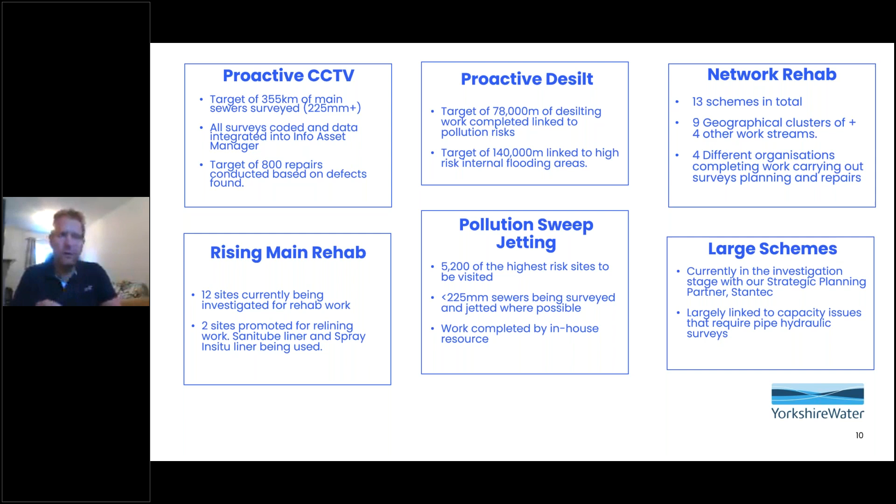So what have we got in our innovation programme? We've got lots of exciting things that we're looking at the moment, actively in our programme. So I'll whistle through them for you. As mentioned previously, we've got a lot of access issues on our network, so it's really difficult to get into the customer's premises to do a survey, and to come back and camera that network, get access in. There's a severe lack of manholes, so we're looking at different ways to do this work.

So we've purchased 2 IPEK lateral CCTV vans, and we're looking to increase our understanding of the location and condition of our lateral sewers with this programme, to help prioritise our rehabilitation programme. So we're trying the idea of working from the manhole in the main road back up to the customer's property without the need to access the property at all.

And we're also looking for better data capture here. Other programmes we use push rods, we're not coding the data. With this programme, all the laterals will be coded, and we're using software which will allow us to map all those laterals as well. So we'll get a really good picture of our network.

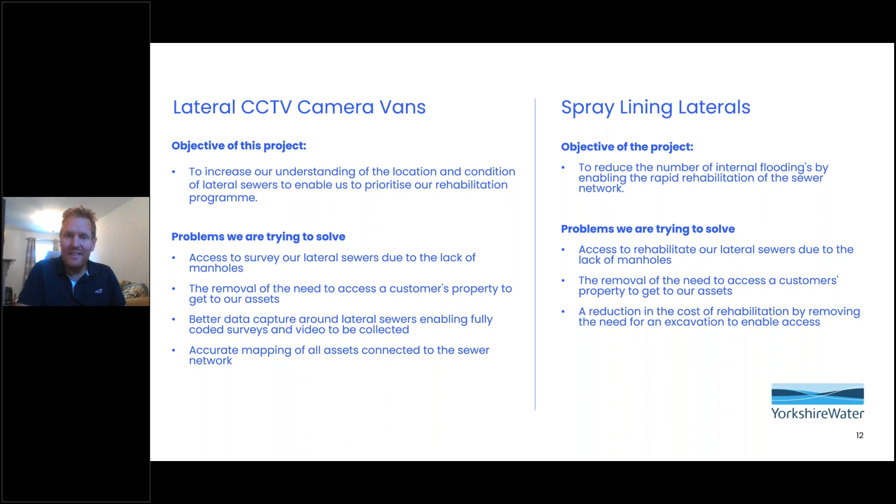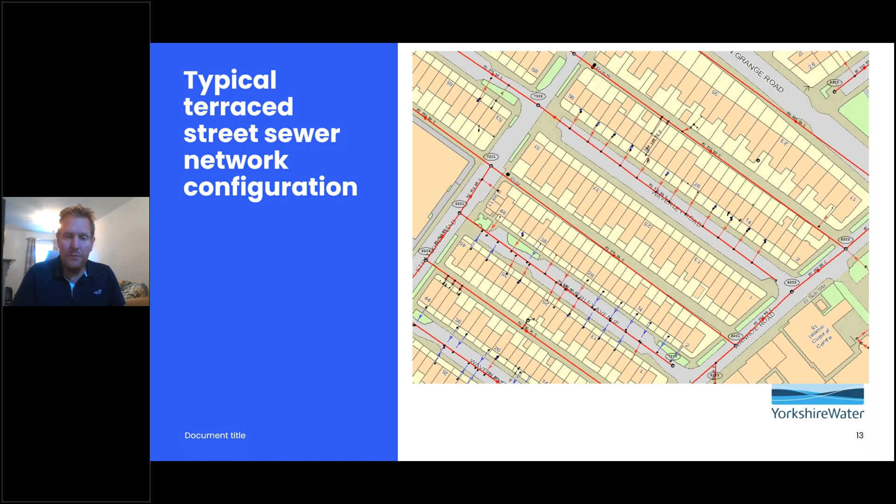This illustrates the point of why we're going after these two technologies. This is a typical sort of terraced street in the Bradford area, and as you can see, that's what we've got on our records - not a lot mapped, much more sewer in there than recorded, and a very severe lack of manholes.

We've got some other exciting projects we're on with. We've got a rising main survey, clean and rehab project just coming forward, looking to evaluate lots of different techniques for inspection and develop a package of techniques to understand the best way of repairing that rising main. We're also looking at various cleaning techniques - ice pigging, gel pigging, and maybe whirlwind as well - trying to really understand and prove these things so we can give the business confidence. We're working with IKT and the UK partner project on the rising main rehabilitation project. That's our rehab element, and also looking at smart air valve technology, all aimed at giving us a better understanding of the condition of its rising mains and how to rehabilitate them.

Everyone seems to have the same problems on the calls today, so we're trying to address all those issues.

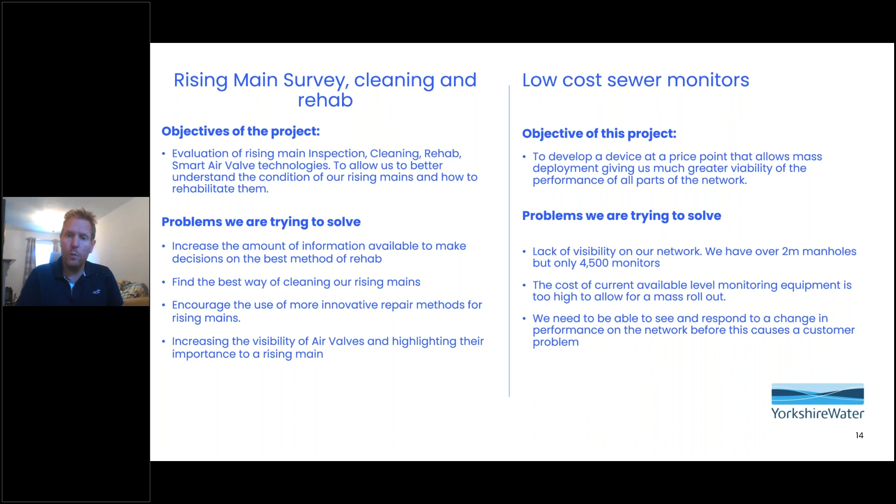Another really exciting project for us is our low-cost sewer monitors. We're aiming to develop a device at a price point that will allow mass deployment, giving us much greater visibility of performance across all parts of the network - we've got a severe lack of visibility of what's happening in a sewer network at any one time. We're developing a device that can go in a manhole, but also on a soil stack or in a gully. It's going to be very affordable, and we're looking at around 5 different sensors within it - not just thinking level is the be-all and end-all. We're looking at other ways of understanding our sewer network.

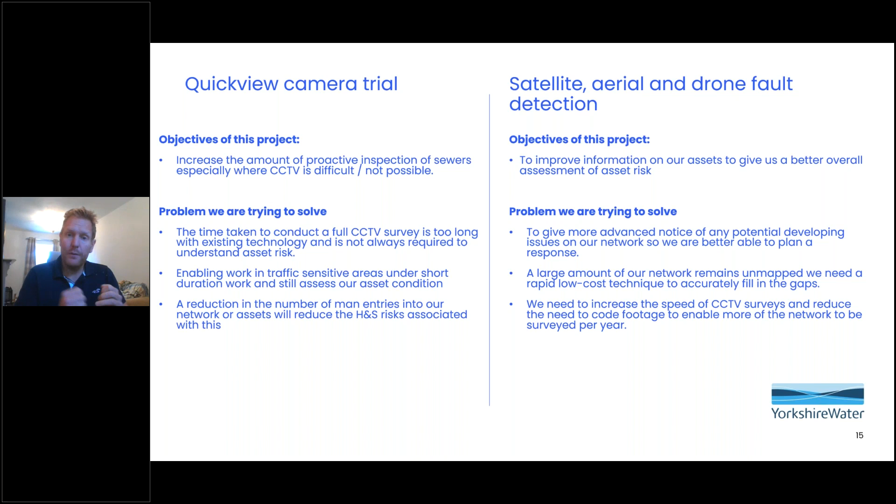A project we're just about to start is our satellite, aerial, and drone fault detection, trying to improve information on our assets to give us better overall assessment. We're looking at things like using satellites for ground movement and groundwater, maybe to indicate future failure or an infiltration problem. Aerial surveys - can we actually map using an aerial survey? Can we put some of the nodes on our maps that we're missing, or even some of the length of sewer or rising mains, and also can we deploy drones within the sewer to speed up our CCTV surveys and reduce the need. So that's some of the things we're going to be looking at.

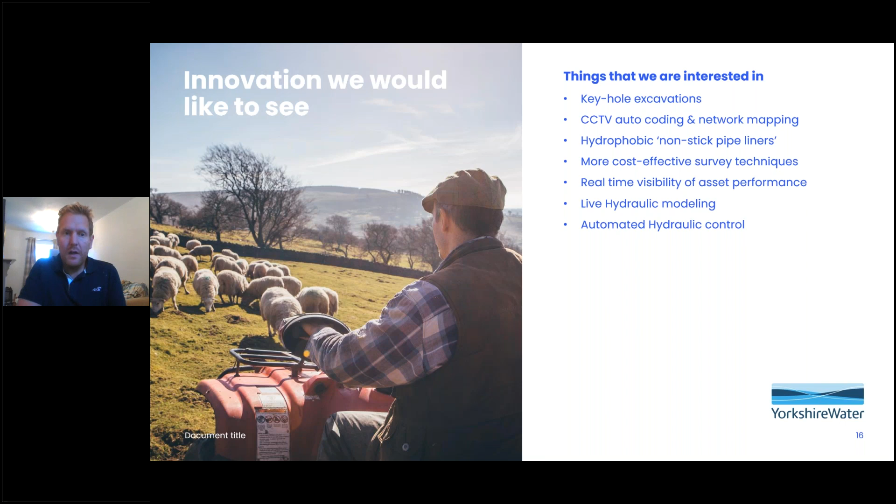And then we've got some of the innovations we'd like to see here - some of the things we're thinking about. If anyone out there has got more details on these, we'd be more than welcome to accept you contacting us. So some of the things we're interested in, I've just gone into a little bit more detail.

We're having increased problems with the number of deep excavations, 2.5 meters deep plus, on small diameter sewers, probably going into the highway away from the customer's property. We'd love to see a method of repair that prevents the need for a typical 5-meter long excavation with shoring and all the works that closes the road and disrupts customers. Could we dig down directly onto the collapse using vacuum or some other technology through a 500mm hole and install an insert repair onto that collapse, or maybe working from either manhole, put a liner through and do something there?

CCTV auto coding is something we're very interested in, but maybe the next step could be adding GPS capabilities to our camera kit, and above ground and underground mapping technologies to enable a one-stop shop - go inside, press a button, it knows where the camera is, it knows where it's been, and that gets uploaded straight back to our systems.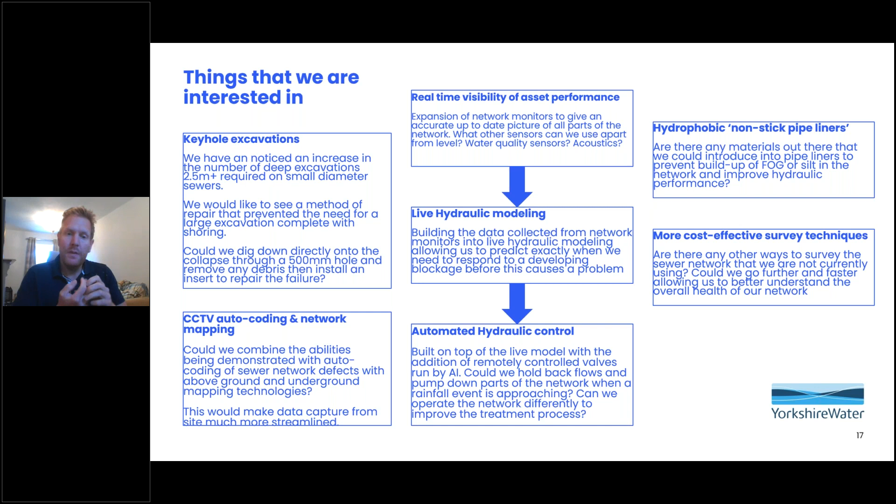Can we get the flow through our network a bit quicker, with more cost-effective survey techniques? If there's ways of surveying a network that's quicker, cheaper, but still gives us that same data on how it looks, we'd love to hear from people on that.

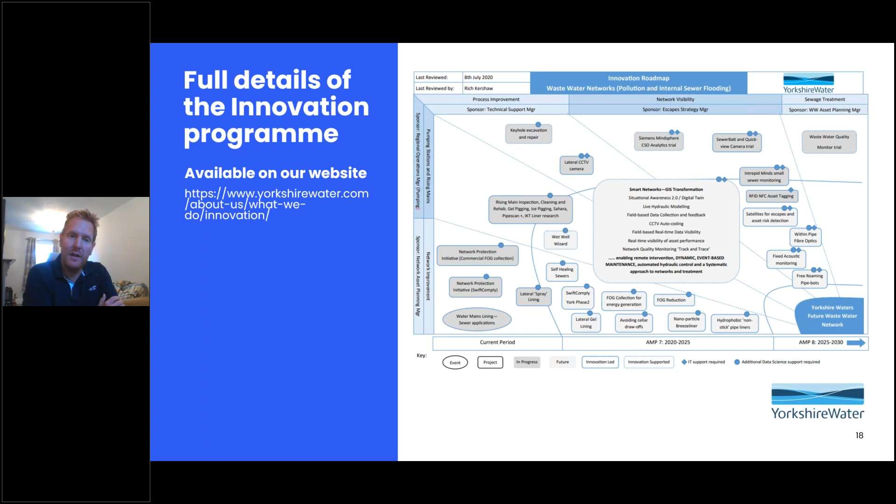Full information on our innovation program can be found on our website, where you can also contact us from there. And that's me. So any questions?

Thanks very much. In fact, you did answer one of the questions I've got here, which was how do you become a supplier to Yorkshire Water or contact Yorkshire Water? So I guess you've got the contact there to the innovations online. Yeah, we are a small innovation team, but we will get back to people if they want to contact us.

Okay, then I have a question for you. Out of your 2 million manholes, do you know approximately how many have been rehabilitated? Not enough, I think would be the answer. No, I wouldn't know that exactly. I think it's a very small amount rehabilitated with any sort of spray lining techniques or anything like that. We'll do a lot more man entries to repair inverts and things like that on our reactive program. Sorry, I don't have an answer to that precisely.

Okay, I think we've still got you, Tom. There was a slight delay there, I think, with your microphone and your webcam, but I think we've got you still okay. Yes. Well, I'll ask you the next question, which is... I can just hear you, sorry, it's just dropping out a little bit, probably at my end. Yeah. Okay, well this was a question which I think was following on from Julian's mention of the lat seal from Lee.